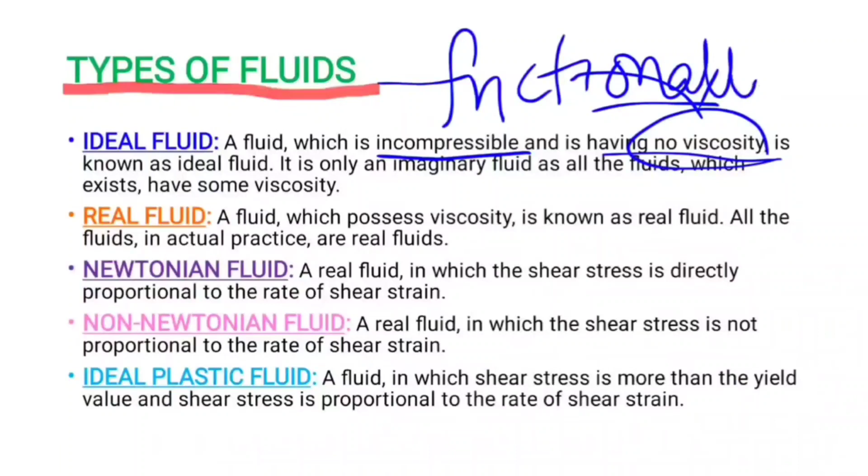The next topic is types of fluids. Ideal fluid: when a fluid is called ideal, it is incompressible and has no viscosity. No viscosity means frictionless. It does not exist in real life; these are imaginary fluids. Real fluids possess viscosity, they have viscosity. All fluids in practice are called real fluids only.

Newtonian fluids: a fluid that obeys Newton's law of viscosity is called a Newtonian fluid. One that does not obey Newton's law of viscosity is called a non-Newtonian fluid. In other words, the same thing: tau is proportional to rate of shear strain is called Newtonian fluid. If it is not proportional, it is called non-Newtonian fluid.

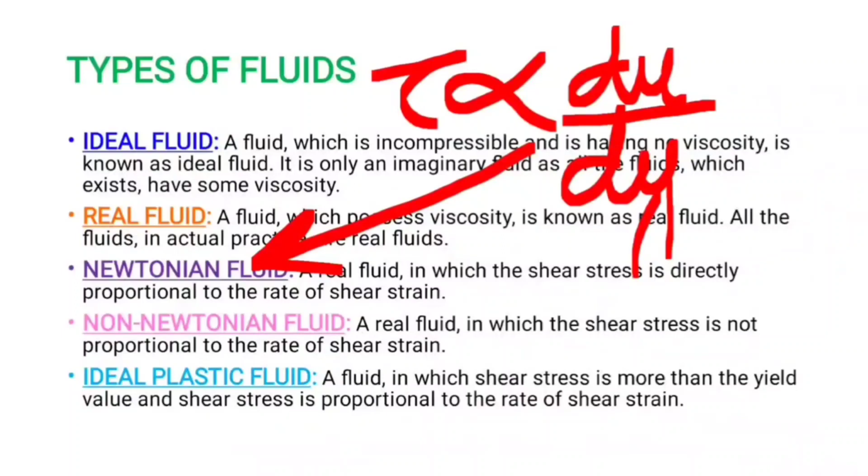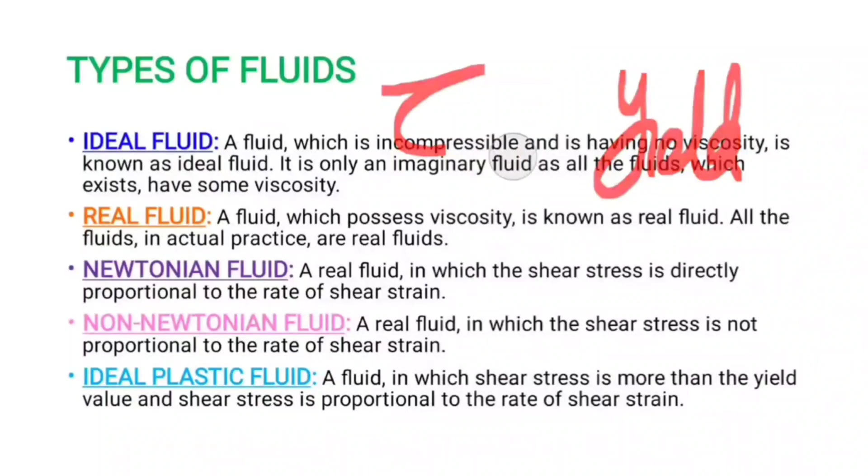Non-Newtonian fluid: if the shear stress is more than the yield value, that is yield stress, yield value, shear stress is more than yield value, then it is called ideal plastic fluid.

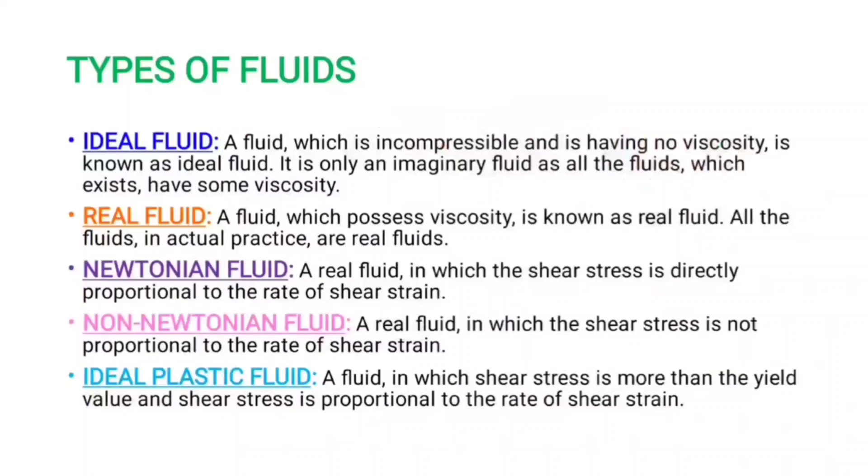Types of fluids: ideal fluid means no shear stress, tau is 0. Newtonian fluid: tau is directly proportional to du by dy. Non-Newtonian fluids: tau does not proportional to du by dy. The curve above Newtonian fluid and the curve below Newtonian fluid are also called non-Newtonian fluid only.

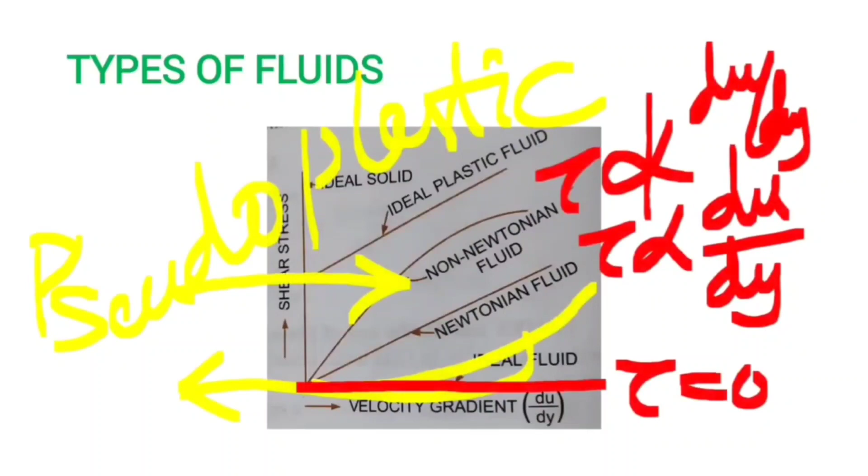The curve above Newtonian fluid is called pseudoplastic. The curve below Newtonian fluid is called dilatancy. If tau value is greater than yield value, then it's called ideal plastic fluid.

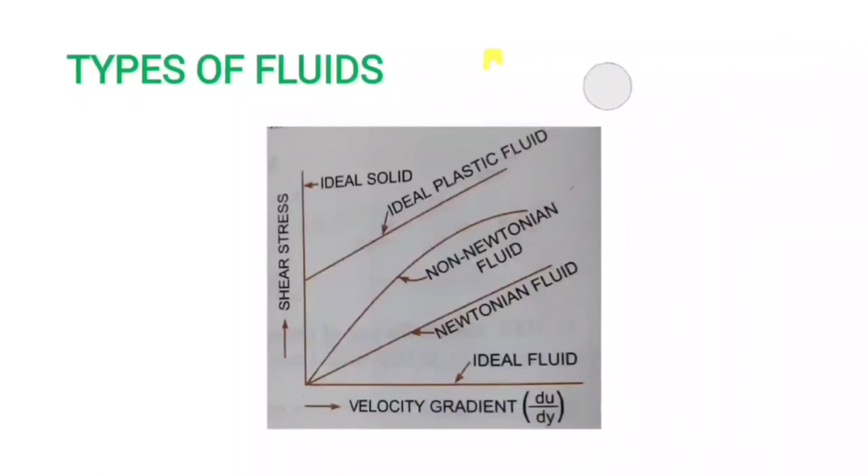Types of fluid is over. The next topic is compressibility and bulk modulus. Bulk modulus is defined as the ratio of compressive stress to volumetric strain. Volumetric strain is change in volume by original volume. Compressive - it is a block, this is force applied, the stress due to that compressive load is called compressive stress. It is the ratio of compressive stress to the volumetric strain, denoted by the letter K.

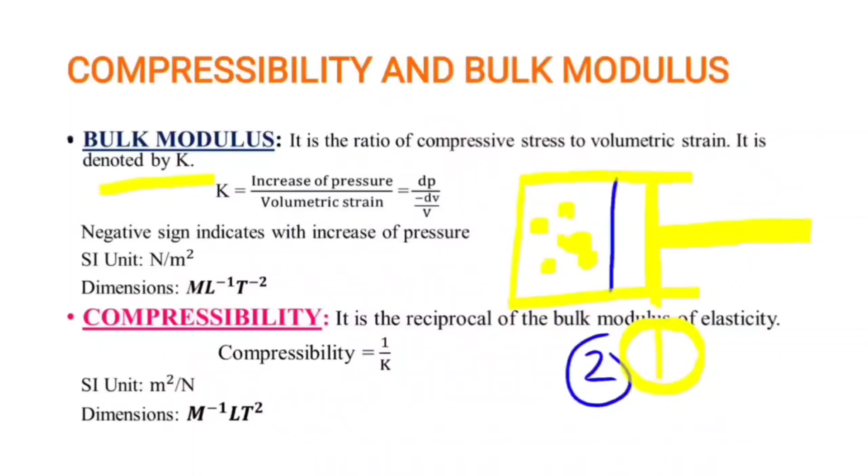I'll give an example for this. For the formula, take it initially closed, the position of this is here at 1. The place of 1 is changed to place 2, then the volume will decrease. So the volume decreases, pressure in this case increases. The negative sign refers to pressure increasing with volume decrease, or volume decreasing with increase of pressure. The unit of bulk modulus is Newton per meter square.

In dimensions, Newton is MLT power minus 2 divided by L square, so dimensions are M, L power minus 1, T power minus 2 for bulk modulus. Compressibility, beta, is the reciprocal of bulk modulus. The units are also reversed, so the SI unit will be meter square per Newton, and dimensions are M power minus 1, L, T power 2.

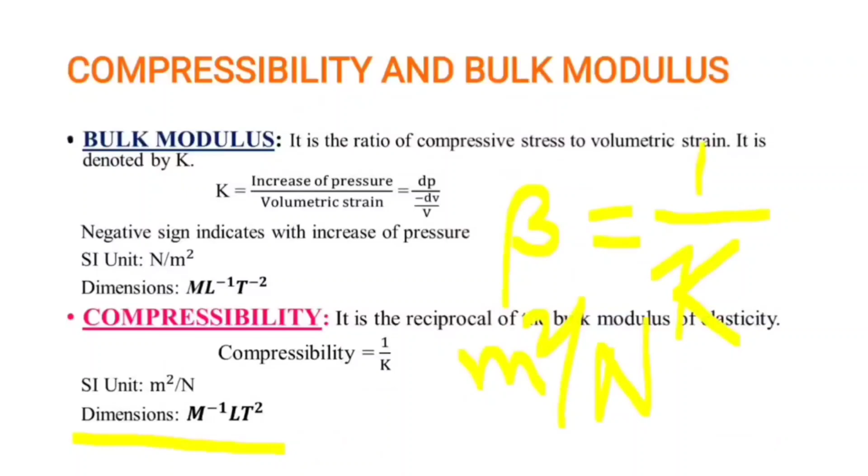The next topic is surface tension. It is defined as the tensile force acting on the surface of a liquid in contact with gas. If it is a liquid surface, it contacts with air, or the liquid surface is in contact with another liquid surface. In both cases, a thin membrane is forming. This is due to surface tension.

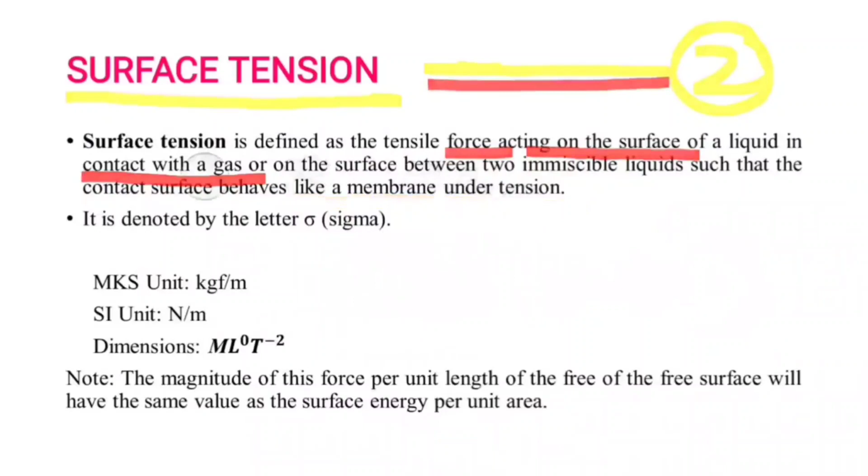Best example for surface tension is mosquitoes on water surface. This is a mosquito, this is water surface. It cannot immerse in water, it stands on the water surface. This is due to surface tension.

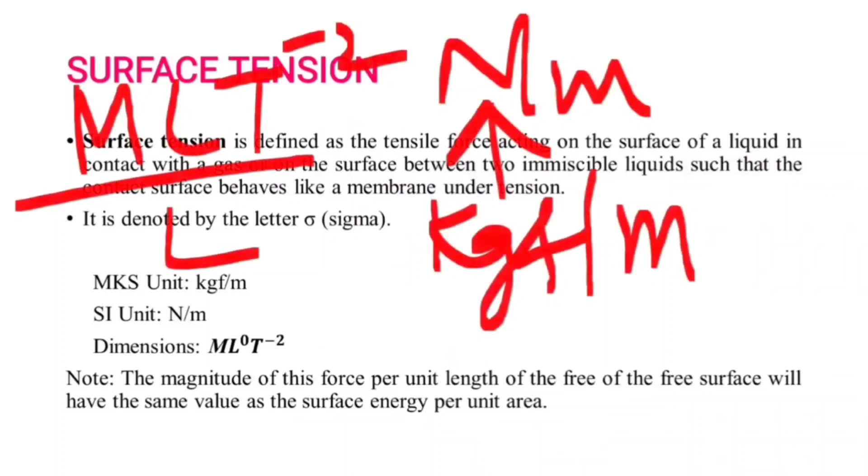It is denoted by the letter sigma. The unit will be kgf per meter - this is MKS unit. In SI unit, Newton per meter. The dimensions for Newton are MLT power minus 2 divided by L, which get cancelled, so M L power 0 T power minus 2 is the dimensions for surface tension.

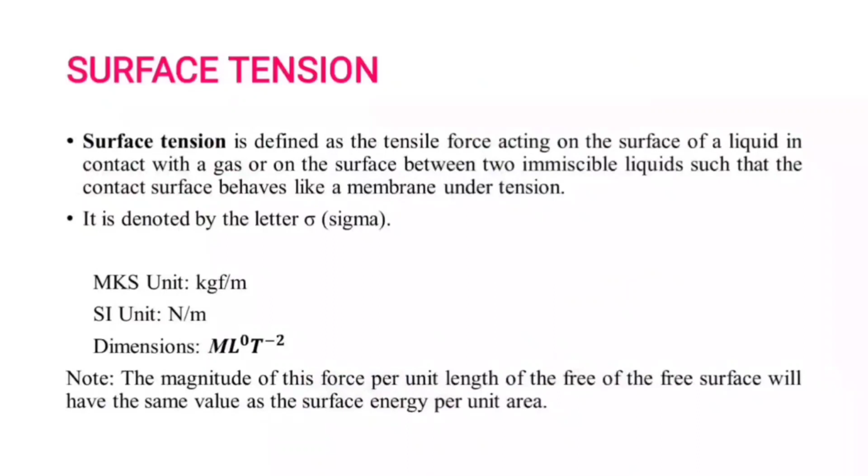Surface tension on a liquid droplet: P refers to pressure intensity inside the droplet, sigma is surface tension, D is the diameter of the droplet. P is equal to 4 sigma by D. How do we get this? By equating pressure force with force due to surface tension.

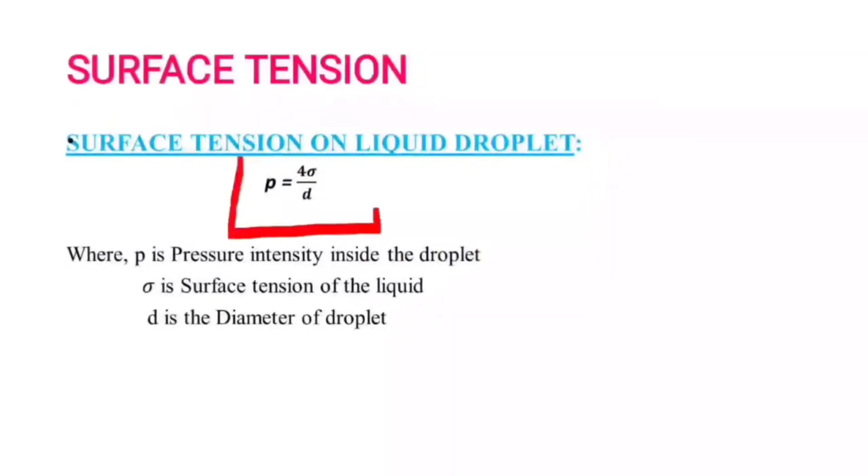Okay, please remember these formulas for your problems, for numericals to solve.

Surface tension on a hollow bubble like a soap bubble: both outside it is in contact with the air, and inside also it is in contact with the air. What does the surface tension definition say? Water or air, contact between water and air, two immiscible liquids. At the contact, there is a thin layer forming due to tension.

So it is 2 times of surface tension due to droplet. Surface tension on a liquid jet is P equals 2 sigma by D. It is like a bar, this is L, this is D.

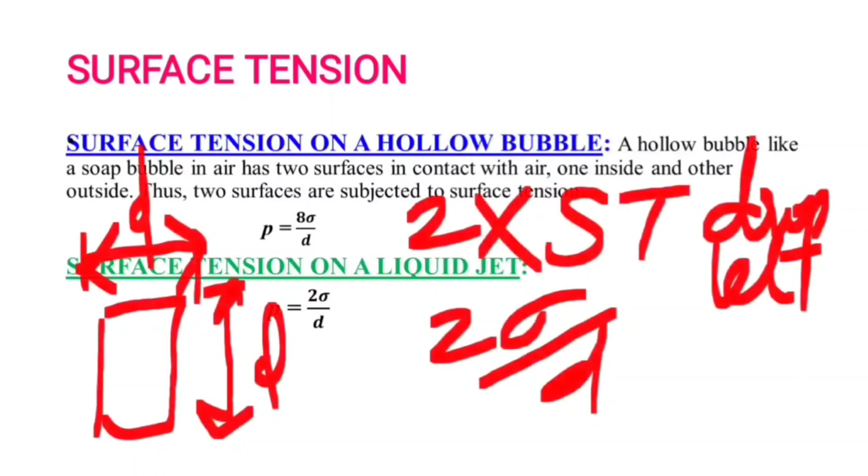The next topic is capillarity. Capillarity is defined as the phenomenon of rise or fall of a liquid surface in a small tube relative to the adjacent general level of liquid when the tube is held vertically in the liquid.

For example, liquid is present, and I insert a capillary tube vertically. If the water rises in the capillary tube, it is called capillary rise. If the tube is held vertically in the tank and the fluid in the capillary tube is falling, it is called capillary depression or capillary fall.

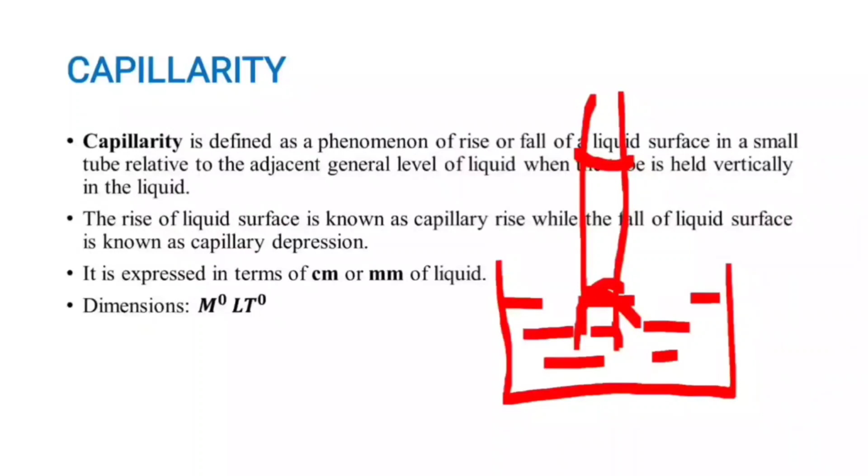It is expressed in terms of centimeter or millimeter of liquid. Dimensions are L only, so m naught L to power 1.

Expression for capillary rise or fall: the same formula, H equals 4 sigma cos theta by rho G D. Gamma equals rho G, so in place of rho G you put gamma: 4 sigma cos theta by gamma D.

In capillary rise condition, theta will be approximately 0, so cos theta will be 1. So the capillary rise formula becomes H equals 4 sigma by rho G D, that is 4 sigma by gamma D.

The value for theta for mercury and glass is approximately 130 degrees. Approximately 130 degrees. Summary.

Fluid in the capillary tube is water, which tends to capillary rise. The theta value will be approximately 0, due to water's more adhesion.

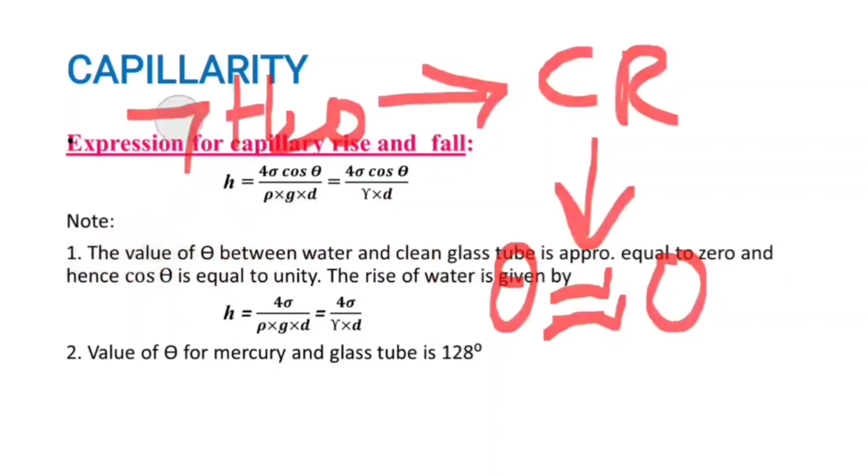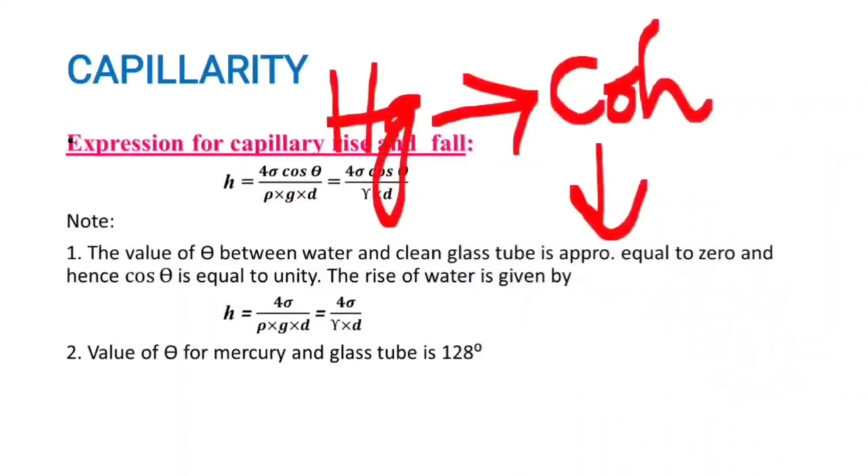Where in case of mercury, Hg, in the capillary tube, there is more cohesion, the theta will be approximately 130 degrees.

Capillary depression or capillary fall.

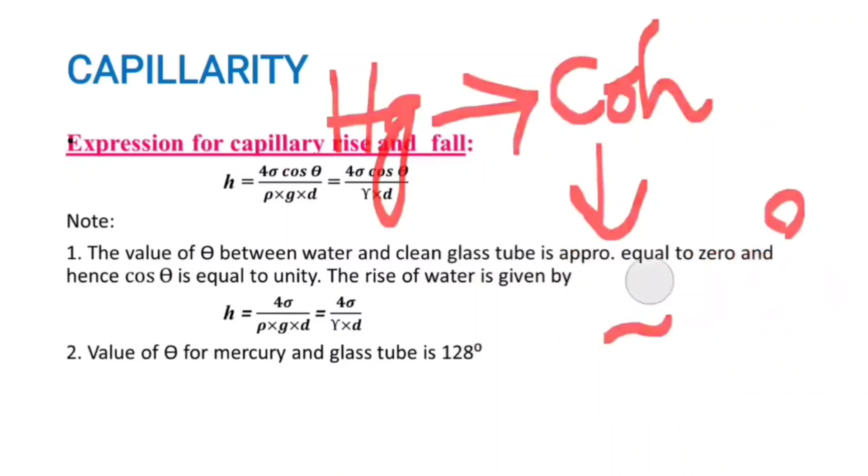The next topic is vapor pressure. Consider a liquid confined in a closed vessel. Take this as a vessel, let's say this vessel is closed. Water is present in this closed vessel. Initially the temperature is 20 degrees Celsius and the pressure is atmospheric pressure.

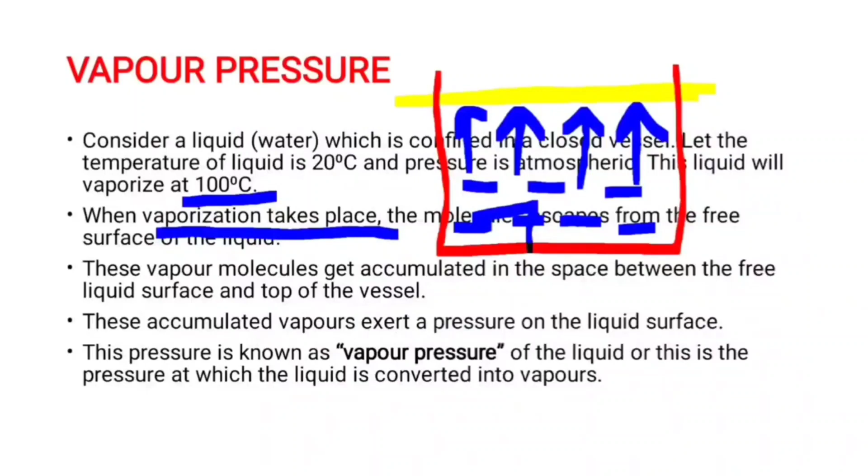It is heating up. The liquid will vaporize at 100 degrees Celsius. At 100 degrees Celsius, vaporization takes place. Molecules escape from the free surface of the liquid. Since it is closed, these vaporized molecules get accumulated in the space between the free liquid surface and the top of the vessel. These accumulated vapors exert a pressure on the liquid surface.

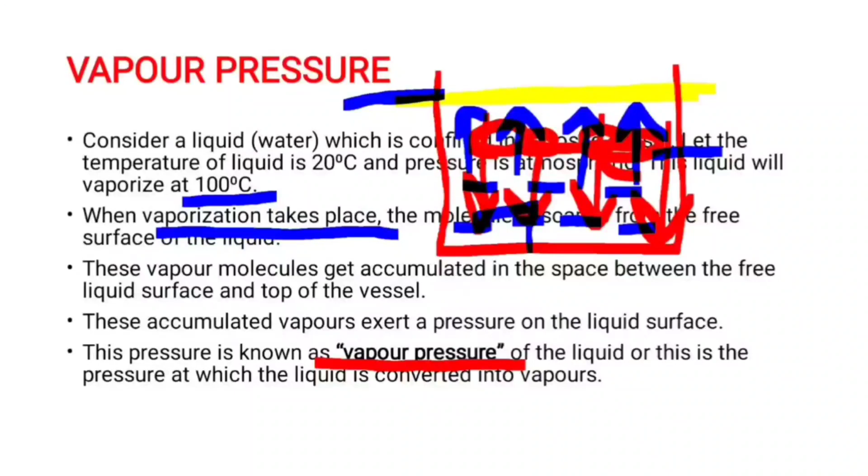These vapors exert a pressure on this liquid. This pressure is called the vapor pressure of that liquid - the pressure at which liquid is converted into vapors is called vapor pressure. I hope this is understood clearly.

It's clear. The next topic is cavitation. Consider a flowing liquid in a system. If the pressure at any point in this flowing liquid becomes equal to or less than - consider less than or equal to, might be equal, but it is less than - the vapor pressure, the vaporization of the liquid starts.

For example, take a river. Here the pressure is less than or equal to vapor pressure. The bubbles of these vapors are carried by the flowing liquid into a region of high pressure where they collapse, giving rise to high impact pressure. The pressure developed by the collapsing bubbles is so high that the material from the adjoining boundaries gets eroded and cavities are formed on them. This phenomenon is known as cavitation.

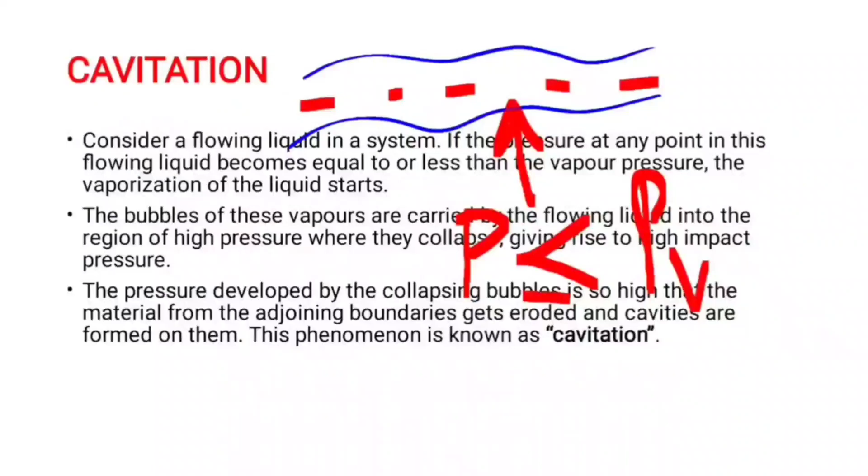I hope this is understood. In the next class we will discuss problems. Thank you.